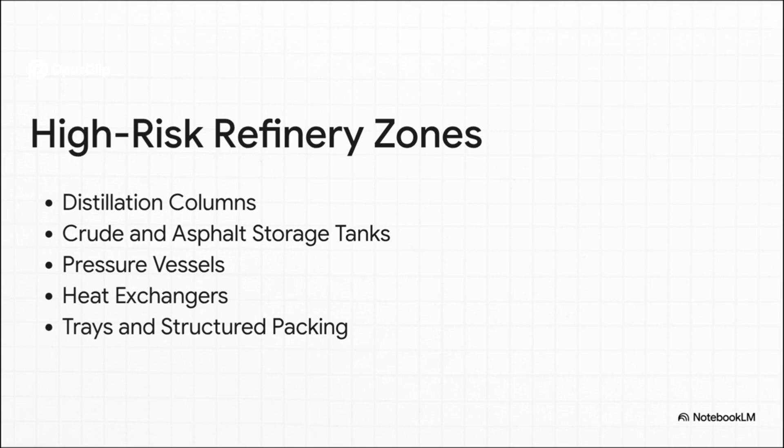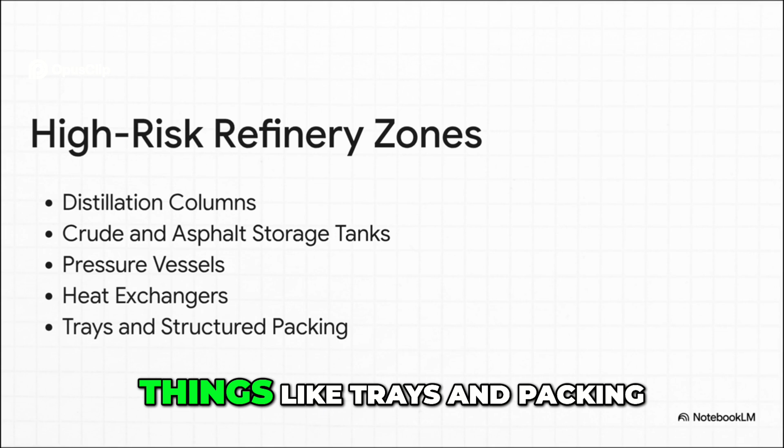So, knowing what this stuff is and how it forms is one thing, but where exactly do you need to look for it? Where are the real hotspots for this danger inside a massive, complex facility like a refinery? Well, the highest risk zones are pretty much anywhere that these chemical deposits can easily build up over time. We're talking about places like distillation columns, those giant crude oil and asphalt storage tanks, pressure vessels, and especially the internal components, things like trays and packing, because they have all these nooks and crannies with tons of surface area for that nasty iron sulfide scale to form on.

Wow. Okay, after hearing all that, it might sound like this is some kind of unstoppable freak accident. But it's not at all. So let's shift gears now, away from the problem and toward the solution, because there are very clear established ways to prevent these accidents from ever happening.

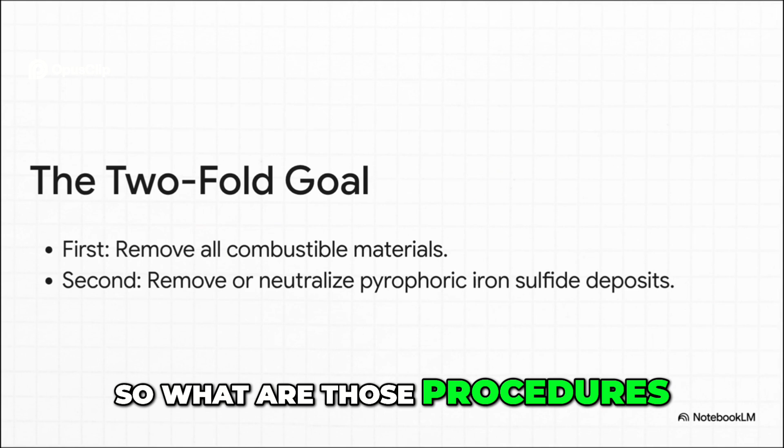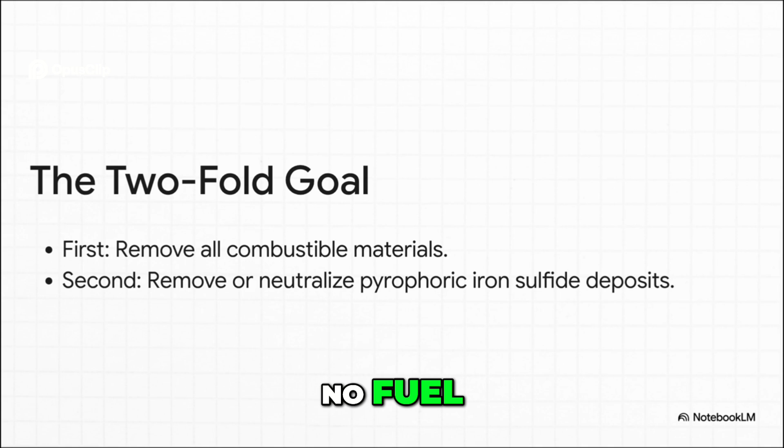Goal number one, get rid of anything that could possibly burn, like leftover oil or gas, right? No fuel, no fire. And goal number two, you have to either completely remove or chemically neutralize those pyrophoric iron sulfide deposits before they ever get a chance to see the open air.

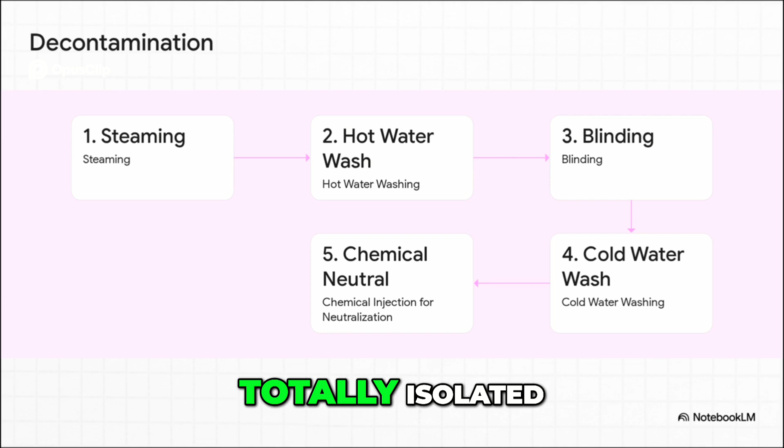And that's achieved through a really meticulous step-by-step decontamination process. It starts with things like steaming and hot water washing to clear out any flammable stuff. Then the equipment is totally isolated. That's called blinding. And only then, once it's clean and safe, do they use special chemical treatments to neutralize the iron sulfide, basically rendering it harmless before anyone opens that hatch. It's a system that leaves absolutely nothing to chance.

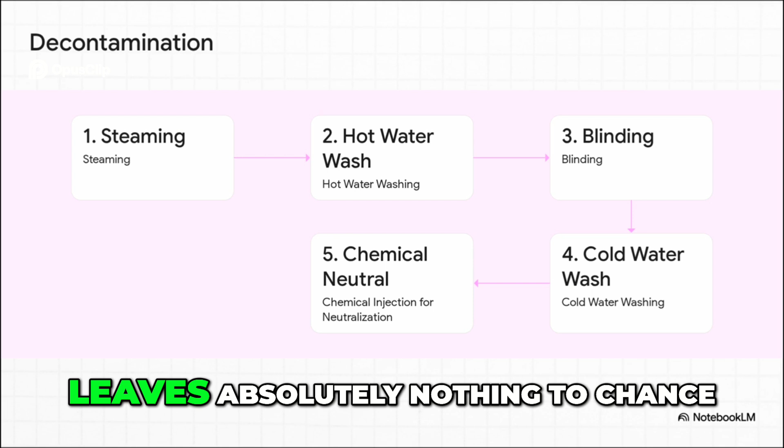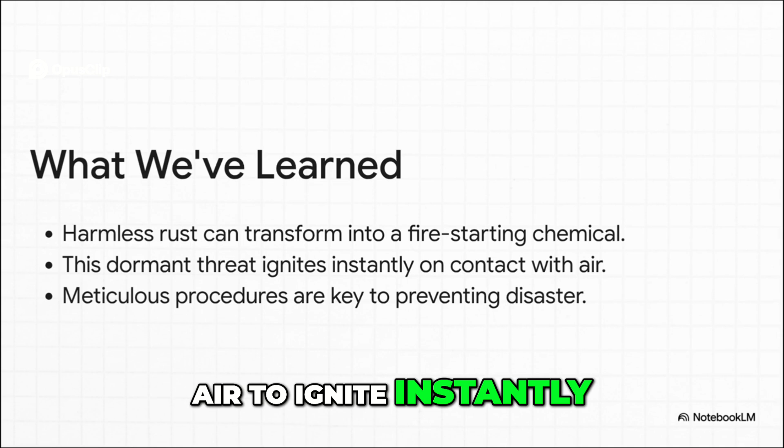All right, let's pull all of this together and do a quick recap of what we've learned about this pretty incredible hidden hazard. So, we've seen how something as ordinary as rust can transform into a hidden fire-starting chemical inside an oxygen-free environment. We've learned that this dormant threat is just waiting for one thing, a little bit of air to ignite instantly. And most importantly, we've seen that while this danger is very real and very serious, following meticulous, well-established procedures is the absolute key to preventing a potential disaster.

You know, it's a powerful reminder that sometimes the biggest dangers aren't the obvious ones. They're the ones we can't see, born from simple chemical reactions just hiding in plain sight. It really makes you wonder, doesn't it? What other hidden dangers are we overlooking in our world? Just waiting for the right, or maybe the wrong, conditions to reveal themselves.